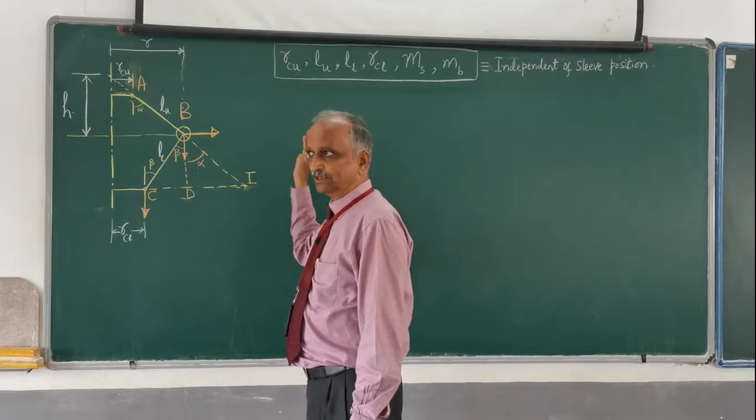So here, I assume that the load of the engine is constant, and therefore the spindle speed of the governor is also constant. For that I have derived an expression: omega square equals G upon H into MB plus MS by 2 into 1 plus K divided by MB. This is what I have derived, without considering friction.

I assume the load on the engine is constant, and therefore the governor sleeve is in a constant position, hence there is no question of friction coming into the picture. This speed is what we call the equilibrium speed.

The only modification I'd like to make is to send this G inside, so I'll rewrite it: omega square equals MB into G plus MS into G divided by 2 into 1 plus K. This small modification gives us what I call the equilibrium speed. This expression gives you the square of the equilibrium speed, and this is the expression to calculate the equilibrium speed.

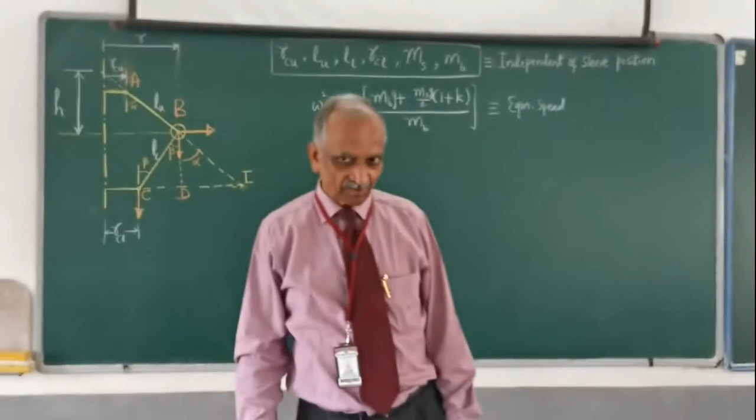Now I would like to bring in what I have calculated so far. This is without friction. If I don't take friction into account, then this is the speed I would like to calculate.

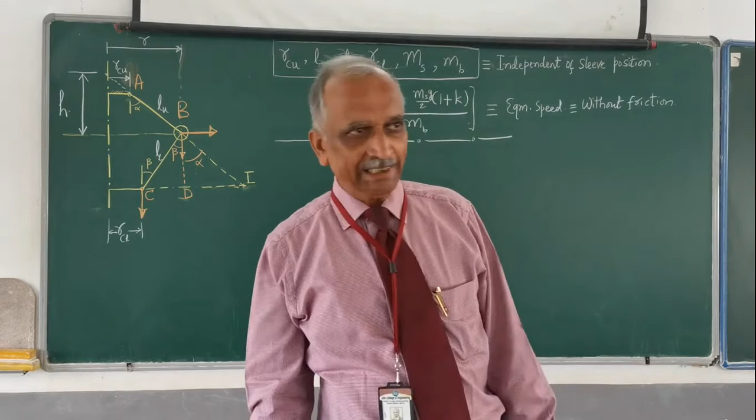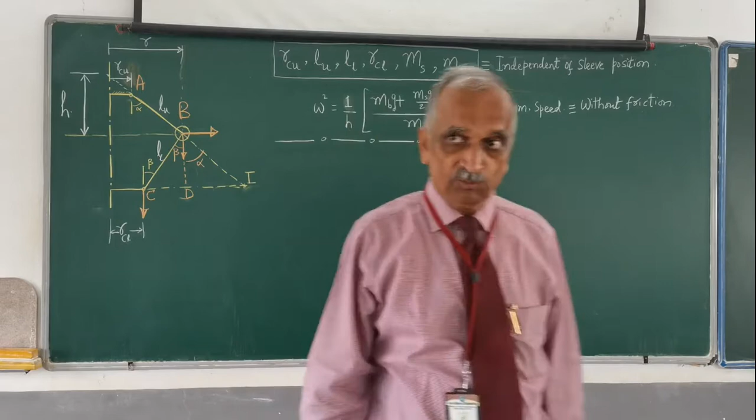Now I would like to bring friction into the picture. Whenever two bodies are in physical contact and likely to have relative motion, friction force comes into picture. Here, the two bodies in contact are the sleeve and the shaft, the spindle of the governor. The governor spindle and the governor sleeve are in contact with each other and have relative motion, so friction between the two will be present. I would like to bring out the effect of that.

So, friction, as you know, let me do a small revision, very briefly. I don't want to go into detail about this. Imagine there is one body lying on another body.

Okay, so now I would like to move this. For an imaginary situation, imagine that there is no friction. This is body number 1 and this is body number 2. I would like to move body 1 over 2.

For a while, imagine that there is no friction between the two. It is a highly theoretical case, such a thing will not be there. Whatever care you may take, you may try to reduce the coefficient of friction, but you cannot make it zero. In an ideal, imaginary case, I am assuming the friction between 1 and 2 is zero. Even if I apply 1 Newton force, it will immediately start moving.

If the friction is not there, then whatever small fractional force you apply, the body will start moving. But if there is friction between 1 and 2, that depends upon so many other factors, and let me assume that mu is the coefficient of friction between 1 and 2.

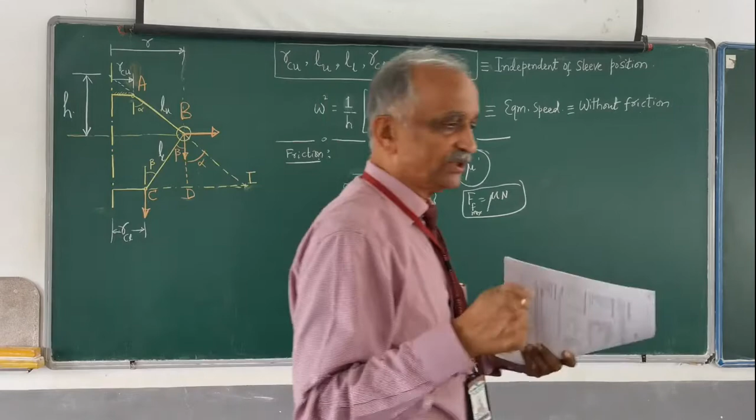Now, if I apply a very small force, say 1 Newton, this body will not move. Why doesn't it move? Because when you apply force, this body feels like moving towards the right, but when it feels that, immediately the friction force comes into picture and acts in the opposite direction. Unless you apply a force which overcomes this force, only then will it start moving. Therefore, whenever a body feels like moving in a direction, exactly opposite to that we have a friction force. That is very, very important.

So let me make use of this concept now in our analysis. Only if I overcome that friction force will it start moving. So now let me assume here.

Now I would like to take the friction force. Let Fr be the friction force, the maximum friction force between what is called the sleeve and the spindle. So now, what is the direction of this friction force?

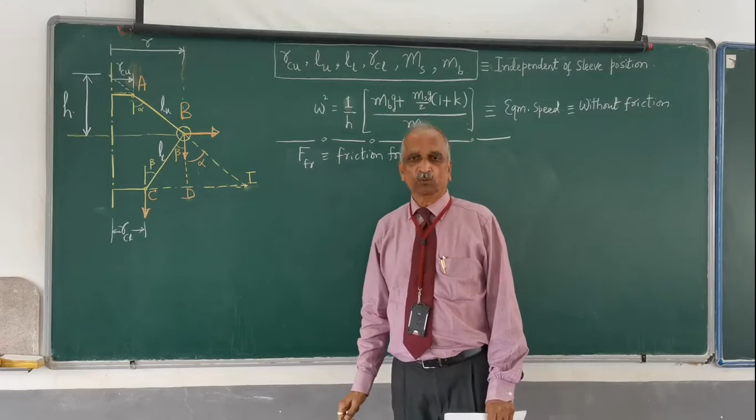That depends upon in what direction the sleeve wants to move. Now I assume that in this diagram, whatever I have drawn, the sleeve is neither in the bottommost position nor in the topmost position, somewhere in between. I assume that, and that is why I shall take this omega as the speed here.

A little later, if the sleeve is at the bottommost position, I shall have a slightly different set of notations that I shall explain to you. Similarly, if the sleeve is at the topmost position, what are the notations? That also I shall explain. I shall assume the sleeve is neither at the bottommost nor at the topmost position, and somewhere in between.

Now the sleeve wants to go down. I assume I have a case where the sleeve wants to go down. So wants to, in general, and the technical term we say is tends to - the sleeve tends to go down.

Why does the sleeve tend to go down? Because the load has decreased, and therefore the speed has increased - wait, we are supposed to say as load has increased, the speed has decreased. So the speed has decreased here. When the speed goes down, the balls tend to move inwards and the sleeve comes downwards. The sleeve wants to come down, so the sleeve tends to go down.

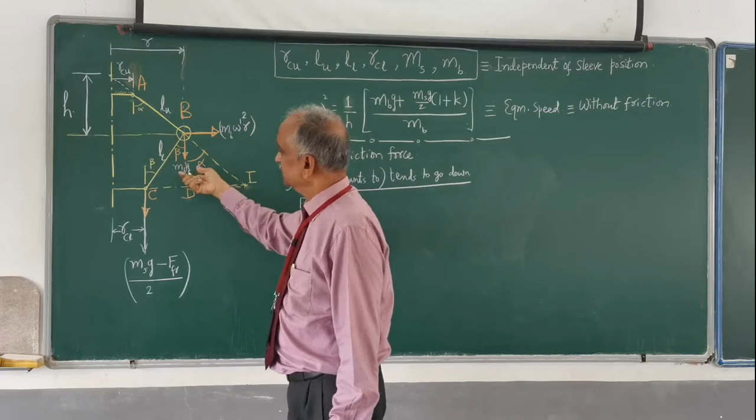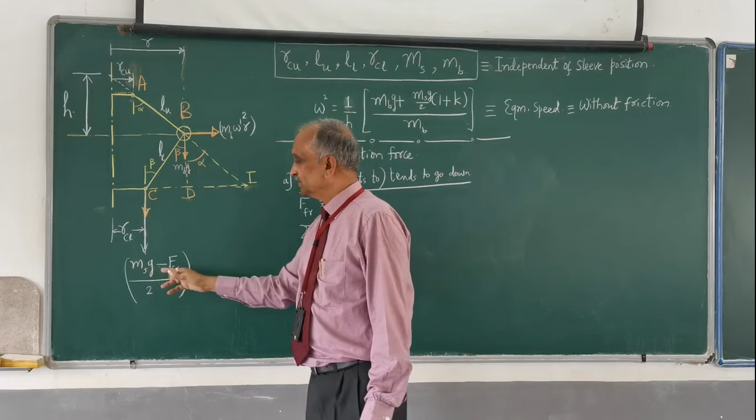Taking all these forces and taking moment about I, sigma M about I equals 0. Since there is not much change except in the earlier equilibrium speed case, the only change is this Ms into G minus Fr. Therefore I get an expression: omega dash square equals 1 divided by h into bracket mb into G plus Ms into G minus Fr divided by 2, into 1 plus k, the whole thing divided by mb.

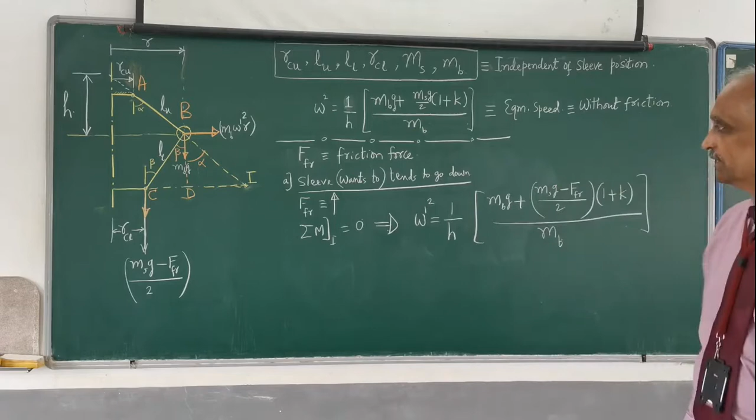So this is the speed when the sleeve tends to go down. When the sleeve tends to go down, this is the speed. Similarly, if I assume that the sleeve tends to go up.

When the sleeve tends to go up, the friction force is in the downward direction. That time the speed, instead of omega dash, I shall assume it is mb omega double dash square into r. Let the speed of the governor be omega double dash.

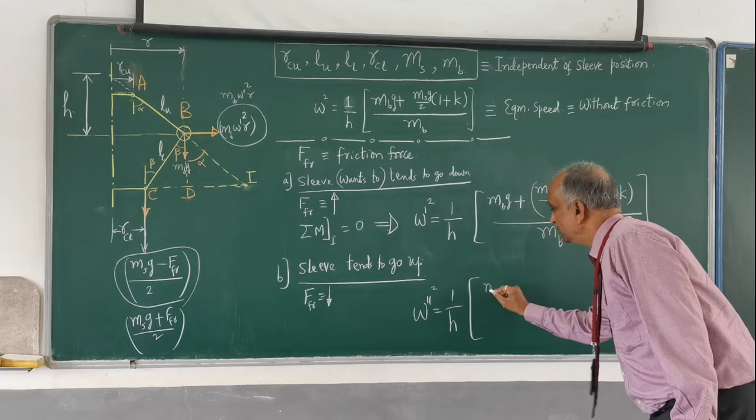So that time the friction force is in the same direction as the weight of the sleeve, and the force is Ms into G plus Fr divided by 2. Though the sleeve has remained there only, if I calculate now, omega double dash square equals 1 by h into bracket mb into G plus Ms into G plus Fr divided by 2, into 1 plus k, the whole thing divided by mb.

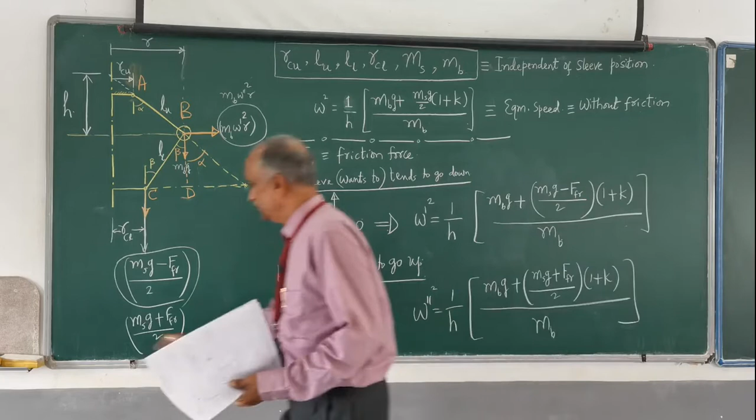So please remember, the sleeve is in the same position, it has not changed its position, between the speeds omega dash and omega double dash. I hope you have understood this, because I would like to make use of some space on the board now, and I shall rub some things.

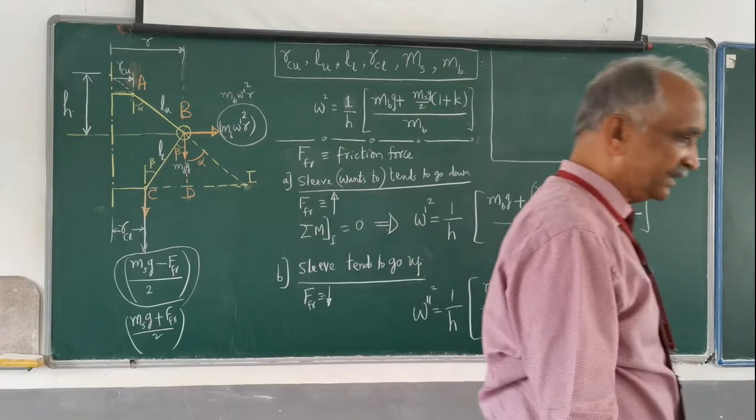So imagine a thermometer, supposed to measure the temperature. Say the temperature right now is about 30 degrees Celsius. For every change in the temperature, it is supposed to respond, and its duty is to indicate the exact temperature. Suppose there is a small change, say 30 degrees becomes 0.5 degrees centigrade more. So the thermometer is supposed to indicate 30.5, but it is not doing it. It is indicating still 30 degrees centigrade.

What do we call it? We say that the thermometer is insensitive to the change in temperature. A similar thing is happening here in our governor also. The governor is in this position. The movement of the sleeve is very important for maintaining the constant speed. If the sleeve does not move at all, even if the speed changes, what do we call it? We say that the governor is insensitive.

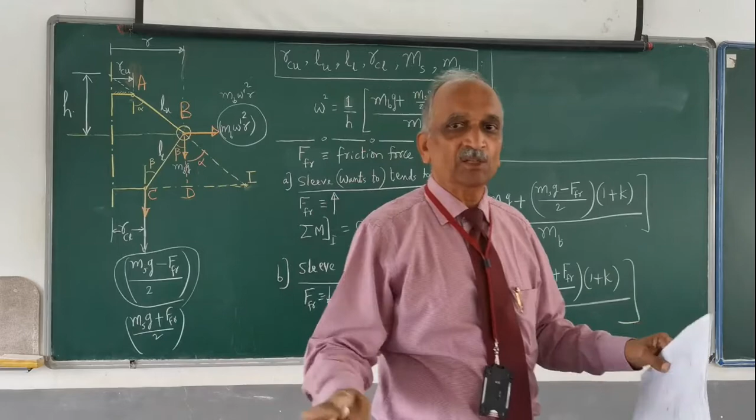You have seen here, because of the friction, even if the speed goes to omega dash, which we have got as one speed, even if the speed goes below omega, that is omega dash, the governor is not changing its position. And even if the speed goes to omega double dash, the sleeve has not changed position. If the speed goes more than omega double dash, then the sleeve will move.

Similarly, if the speed goes below omega dash, then only the sleeve will move. Between omega dash and omega double dash, the sleeve is not moving at all. No change in sleeve position, and therefore we say that it is insensitive. The governor is insensitive in this position. During this range of speed, the governor is insensitive and doesn't do any work at all. Its intended work it is not doing, and therefore we say that governor at every position...

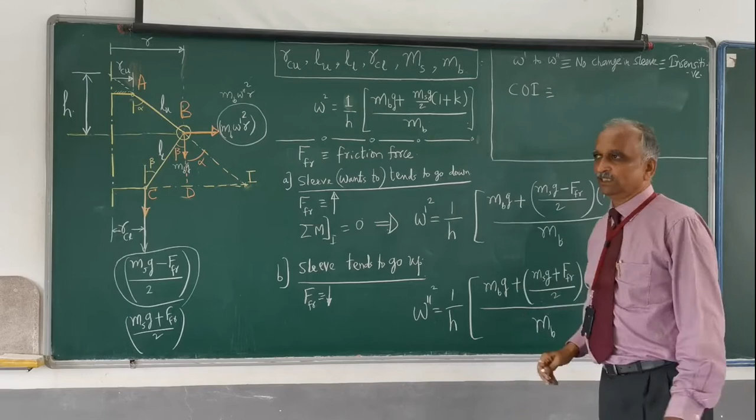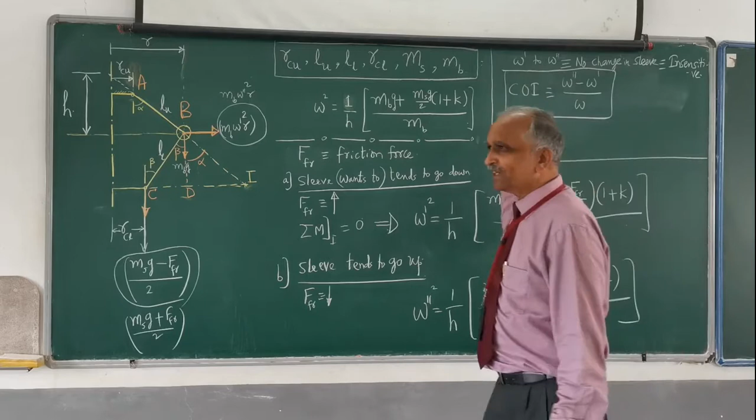Please remember whatever I have shown now is true with every position. At this position, the speed is omega when friction is not there. If friction is there, then it will remain in the same position even if the speed goes down up to omega dash. The governor sleeve will remain in the same position even if the speed increases up to omega double dash. So between omega dash and omega double dash, the governor is insensitive. Therefore, there is something called coefficient of insensitivity depending upon the governor, calculated as COI, coefficient of insensitivity, equal to omega double dash minus omega dash divided by omega. This should be as small as possible for very effective working of the governor.

So what is the effect of friction? The effect of friction on a governor is that friction makes the governor insensitive, meaning it doesn't allow the governor to function its duty for a certain range of speed at every position. So the governor doesn't do its duty because of the friction. And if this friction is smaller and smaller, then the coefficient of insensitivity becomes smaller and smaller. That is how we can make the governor more and more effective.

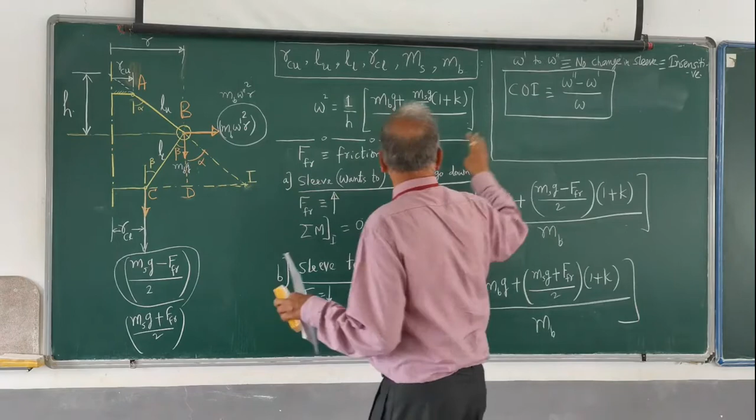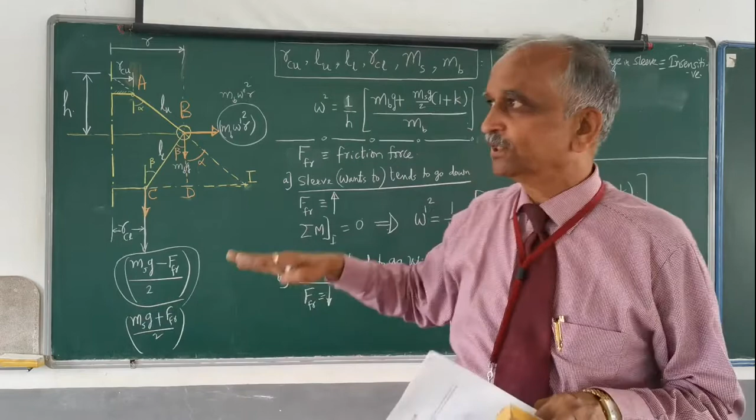So as I said, this analysis shows omega dash to omega double dash. What is omega dash? Omega dash is the speed of the governor at some position of the sleeve when the governor sleeve tends to go down. Similarly, omega double dash is the maximum speed of the governor at the same position of the sleeve. So please remember, this is true for every position of the sleeve.

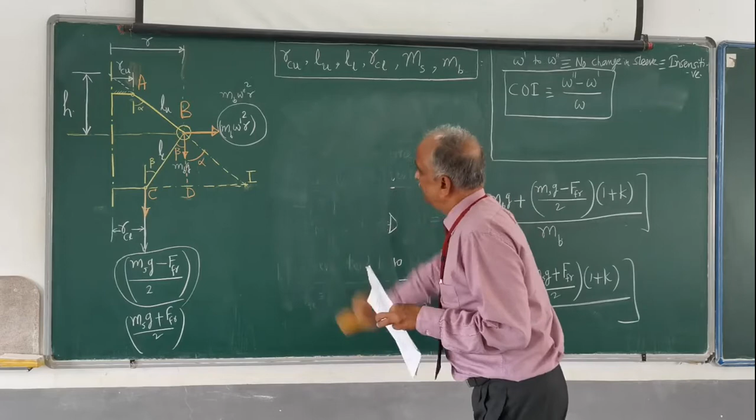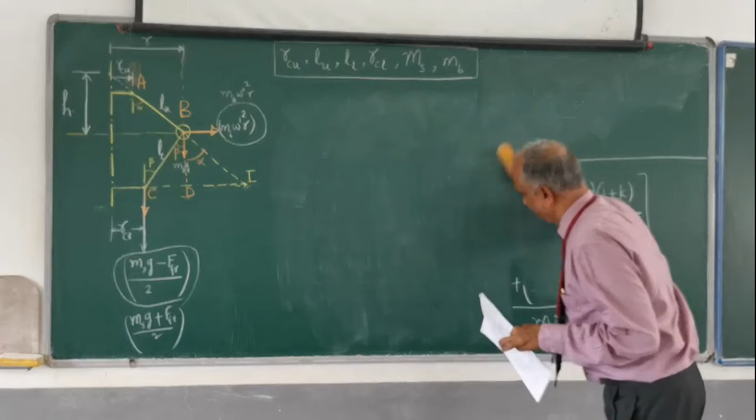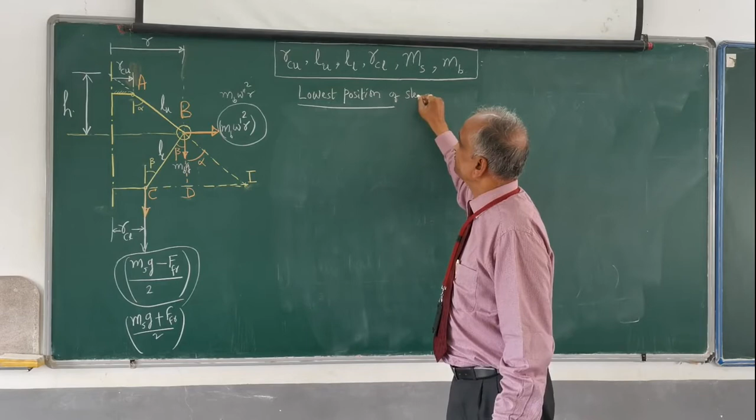And what is the position of the sleeve when the governor ball is running at its lowest speed? Please remember every governor shall have a lowest position and a highest position of the sleeve. So, lowest position, when the governor sleeve is at the lowest position. Please remember these, RCU, LU, LL, RCL, MS and MB, they remain the same.

Then what are the different ones? Alpha minimum, then what is called beta minimum. Minimum corresponds to the lowest position.

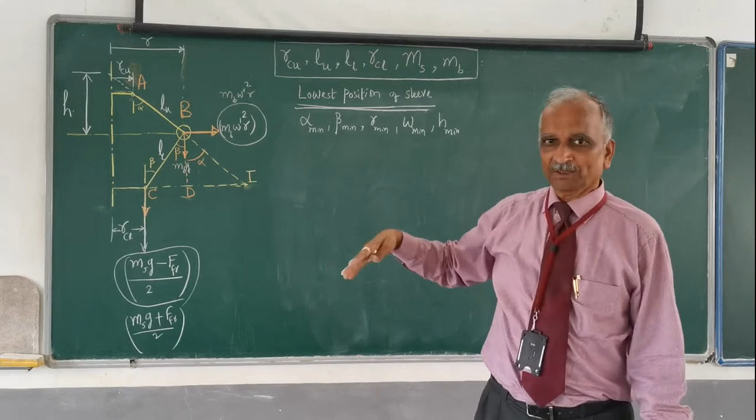Remember, H minimum is more than H maximum. I mean, when the sleeve is at the topmost position, the H value is smaller than this, but I still call it H minimum. H minimum is not the minimum value of H. H minimum means the value of H when the sleeve is at its bottommost, lowest position. These are the values corresponding to the equilibrium position of the sleeve.

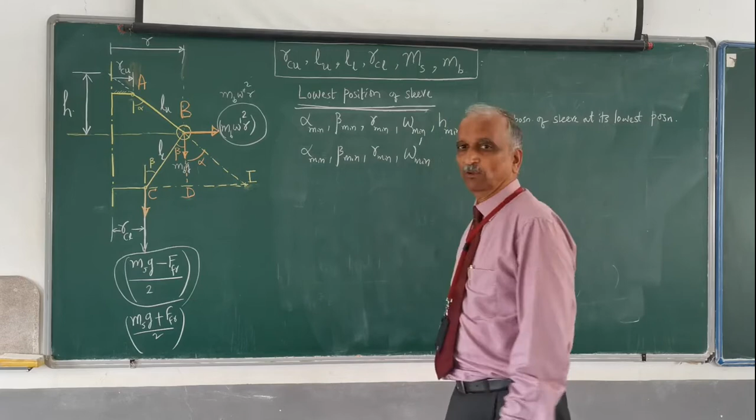Similarly, I have the same value of alpha minimum since the sleeve has not changed its position. R minimum is also the same. But omega minimum is not omega minimum now, I shall take omega minimum dash, which is the speed in the lowest position when the sleeve tends to move down. This also is the same, H minimum.

This is when we take friction, when friction FR tends to go up, or is in the upward direction. Similarly, alpha minimum, beta minimum, R minimum, then omega minimum double dash, comma H minimum - this is when FR is in the downward direction.

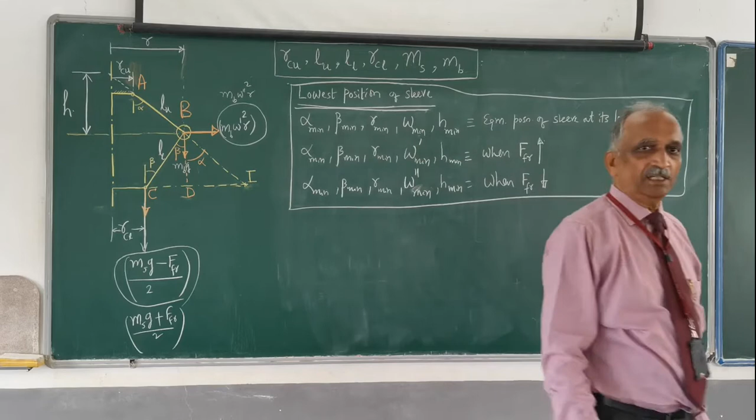These correspond to the different notations you use when the sleeve is in the lowest position. Similarly, you have a similar set for the topmost position of the sleeve.

Okay, so first, when you don't consider the friction, what will you have? You will have what is called alpha maximum, then beta maximum, then the radius is also maximum, then omega maximum, then H maximum. Please remember, H maximum value is less than H minimum value. H maximum corresponds to the height of the governor when the sleeve is at its topmost position. So this is if friction force FR is 0, in that case these are the notations.

Similarly, alpha maximum, beta maximum, R maximum, omega maximum dash, and H maximum - this is if FR is in the upward direction. Similarly, alpha maximum, beta maximum, R maximum, omega maximum double dash, and H maximum - this is when FR is in the downward direction.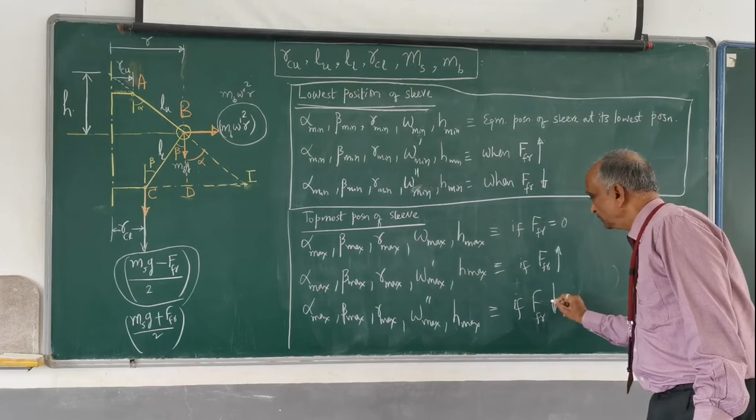So you are normally asked to find out, if the sleeve is in the bottommost position and the topmost position, what are the speeds, and finally you are asked to find out what is called the range of speed. A very common term normally asked: a range of speed considering friction.

Taking friction force into account, what is the range of speed? So find out what is the maximum speed and what is the minimum speed. The minimum speed will occur whenever the sleeve is at the lowest position.

So at the lowest position of the sleeve you have three speeds: omega minimum, omega minimum dash, and omega minimum double dash. Omega minimum is always between omega minimum dash and omega minimum double dash. Omega minimum dash is the lowest speed, and the maximum speed will occur when the sleeve is at the topmost position - that is nothing but omega maximum double dash.

The range of speed taking friction into account is omega minimum dash to omega maximum double dash. Sometimes some books call range of speed as the difference between the maximum speed and the minimum speed. Even so, you write the range from lowest speed to maximum speed, then subtract the two, and write down the value in radians per second.

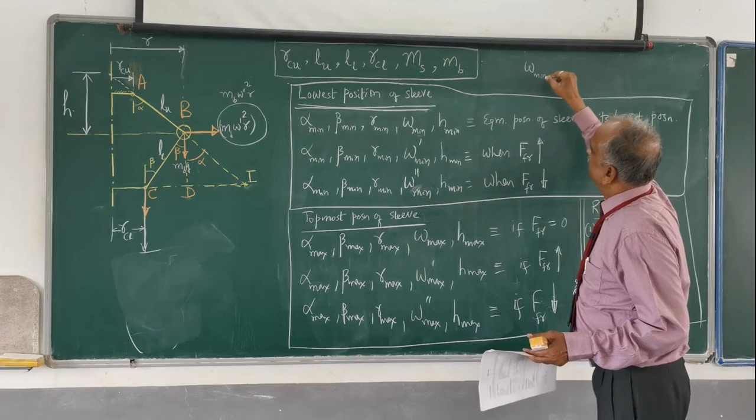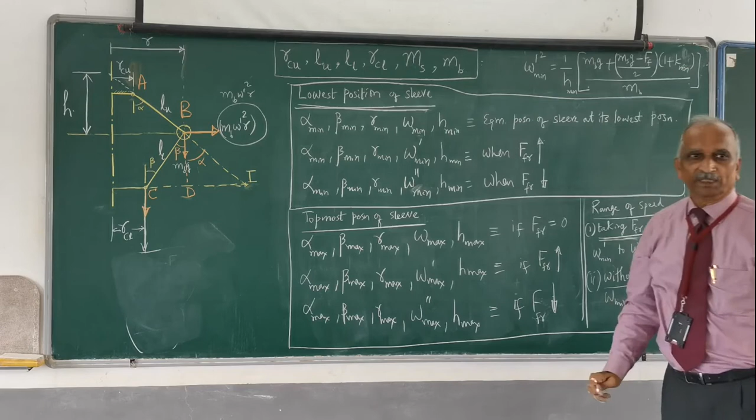If I want to write down omega minimum dash, omega minimum dash square is equal to 1 by h into mb into g plus ms into g minus ff, divided by 2 into 1 plus k, the whole thing divided by mb. Please remember, in all these questions h is nothing but h minimum, and this will not change. This k also corresponds to k minimum. What is k minimum? Tan beta minimum divided by tan alpha minimum. This is how the formula will change.

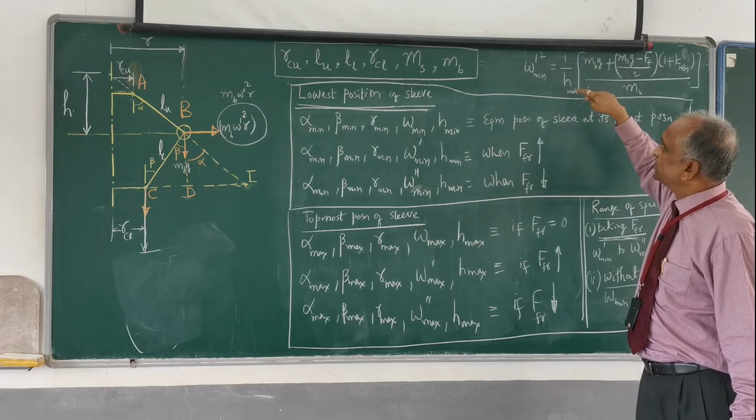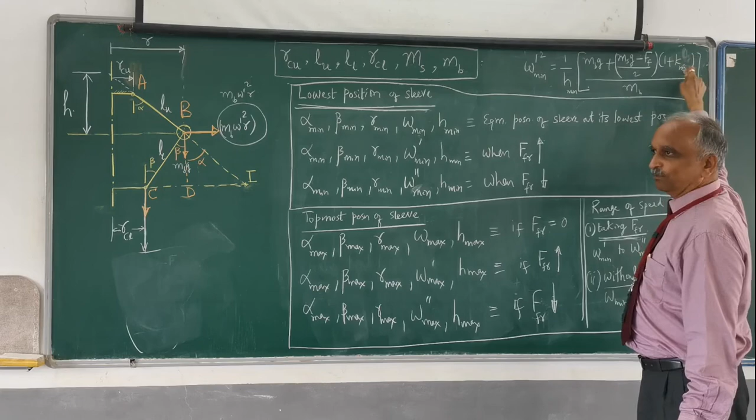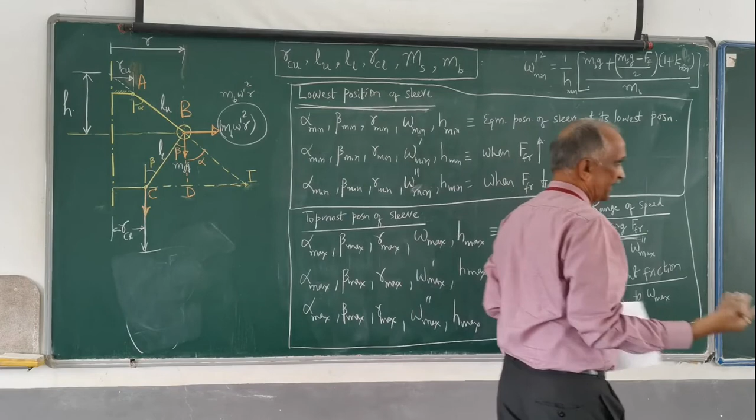Okay, so similarly, what is omega maximum double dash? Omega maximum double dash square is equal to 1 upon h maximum, mb into g plus ms into g plus ff (friction force), divided by 2 into 1 plus k maximum. What is k maximum? Tan beta maximum divided by tan alpha maximum. So that is how you can find out omega minimum dash, omega maximum double dash, and the range of speed.

Okay, so with this, the Porter Governor discussion is over, and you can solve any problem on Porter Governor now. And if you have any doubt, you can definitely come back to me and send your query. I shall definitely be very happy to reply to it. Thank you.